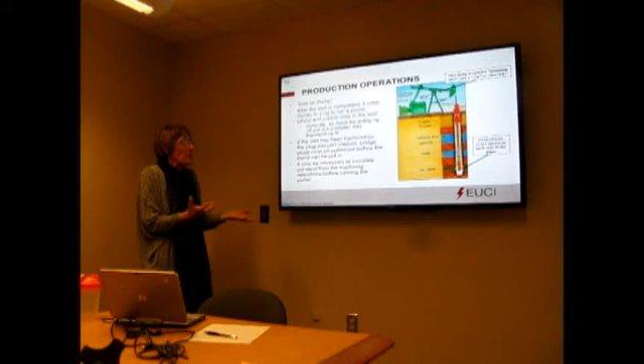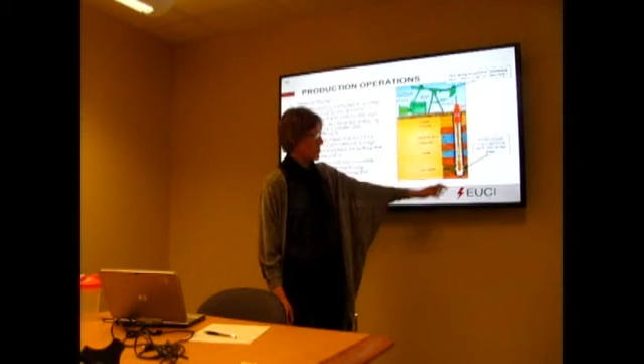You hear people talk about run-on pump. I don't know why they don't say run-in pump, because the pump is always in the well. The sucker rod pump, the pump itself is down at the bottom of the well, connected back by a series of sucker rods, which are a rod about yay big. It'll be a steel rod connected together end to end, all the way back up to the top of the well. The sucker rods are inside a piece of tubing about yay big, also pipes connected together end to end until they reach the top of the well.

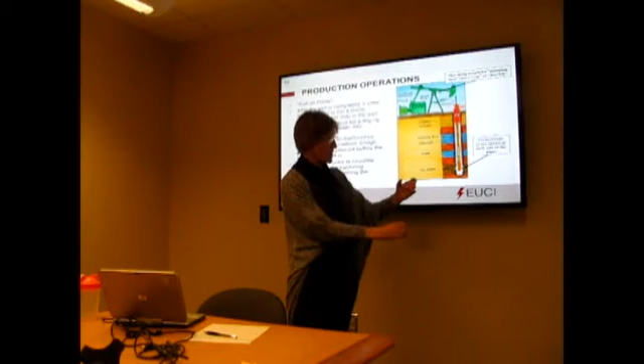The pipes are about 40 feet long because they've got to fit on a semi-truck to get them out to the site, and the sucker rods are usually a little shorter, but they're also connected together one after another to get to the bottom of the well.

Generally, when we go to run the tubing and the sucker rods in, we'll use a smaller, less expensive rig than the drilling rig or the fracking rig that was out there.

If the well has been fractured by the plug and perf method, then you'll have bridge plugs you've got to pull out before you can put the pump in, and you might also have to circulate out sand from the frac operations before you can run your rods, tubing, and pump in the well. Actually, people say run the rods and the tubing and pump, but you're going to have to run the tubing and then the rods and the pump afterwards.

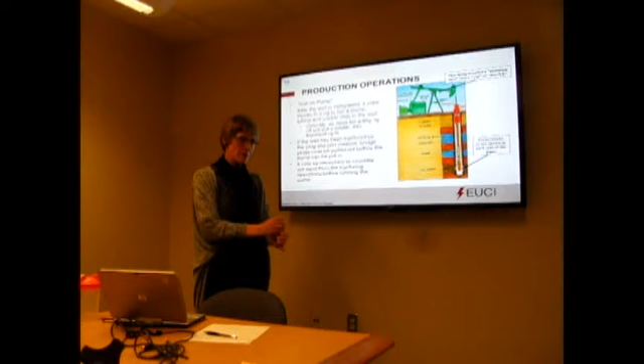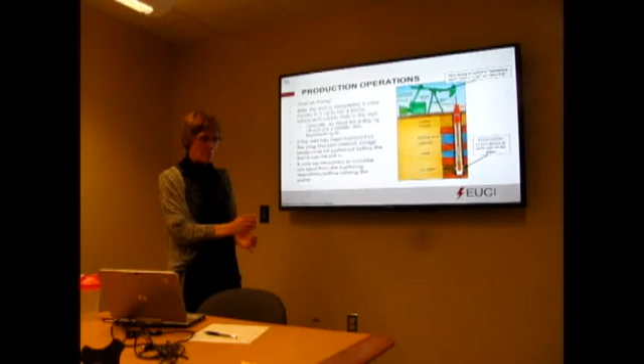There's two different kinds of sucker rod pumps. Some of them you run the tubing, then the pump, then the rods, and some of them you run the tubing, and then the pump hooks onto the end of the rods and you run it inside the tubing. So it might be that the pump is with the tubing, or it might be that it's with the rods. It just kind of varies.

You see different kinds of pumping units out there. If you see a little bitty one, it's because the well is probably shallow or it's not moving a lot of fluid. If you see a great big one, it's probably because the well is deeper and might be moving a lot more fluid, so you need more horsepower. It might have bigger diameter rods, which are heavier and require more leverage to lift them, or it might be horizontal, with the rods going around the corner and having more drag. Generally, the bigger ones will have a bigger motor. The motor will be back here.

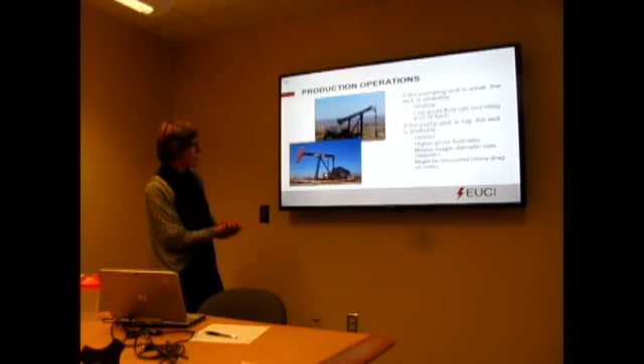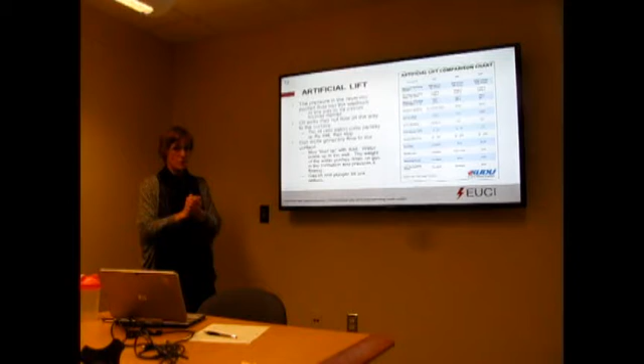We need artificial lift because although there's always going to be some pressure pushing the fluid in the reservoir over to the well, the pressure will become depleted as time goes on, and it may not push the oil, gas, and water all the way up to the surface. So oil wells might not flow all the way to the surface. The oil and water might come part way up the well and then stop, and that's why we've got to lower the pump down the well to get the oil and bring it all the way up to the surface.

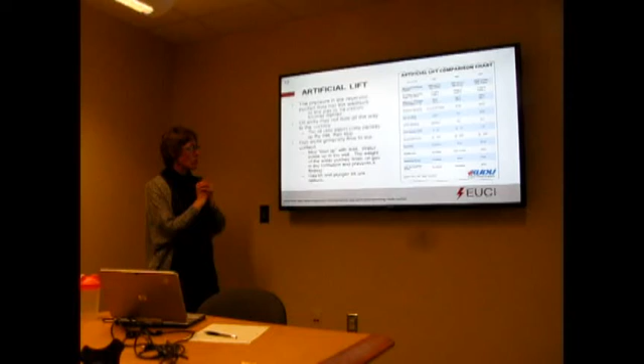Gas wells generally will flow all the way to the surface. If the gas doesn't come up to the surface by itself, there's not really such a thing.

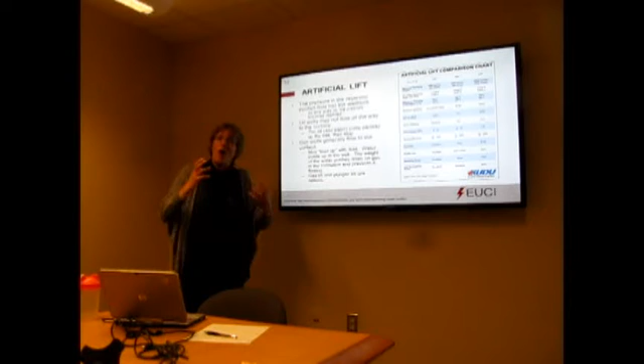It's not common anyway to have a downhole compressor. We can get a downhole pump, but a downhole compressor that's economic and common, I sure don't know about it.

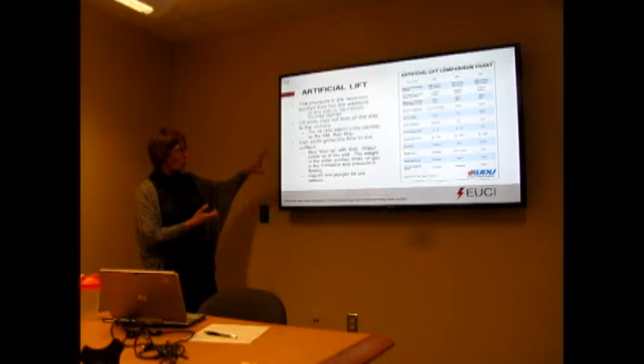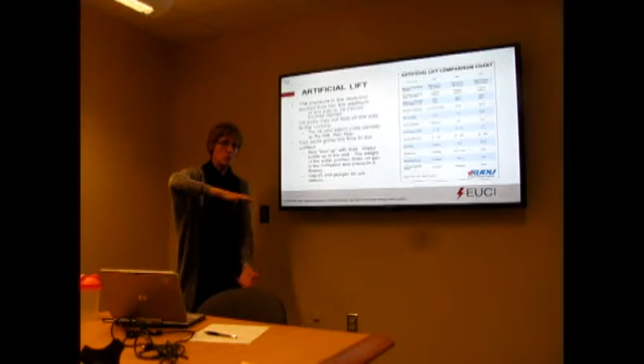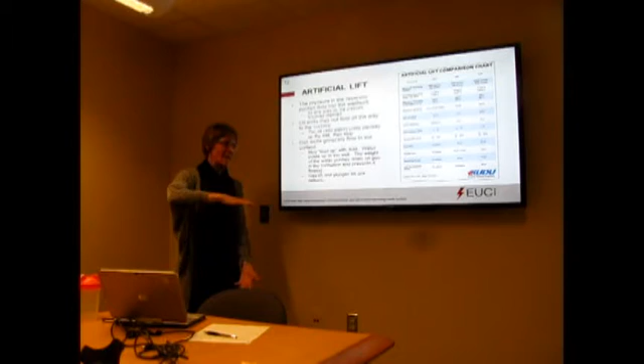Gas wells will flow all the way to the surface, but they might display a behavior we call loading up with fluid. Water might build up in the well, and just like water or drilling mud will control the well during drilling, which is desirable during drilling, water might build up in the well and push the gas down, which is undesirable once we're producing. Once we're trying to produce the well, we do not want fluid building up and pushing the gas down, keeping it in the formation. So this is what people mean when they say the well has loaded up with fluid - water has built up in the well and is suppressing the gas, keeping it from flowing.

So gas lift and plunger lift are a couple of options for getting your gas wells unloaded from having fluid in them.

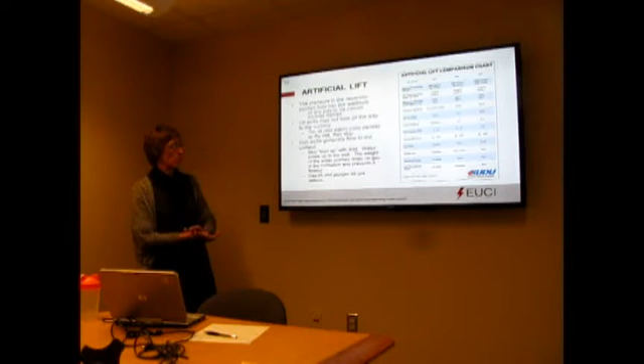Some popular artificial lift methods are pumping units and rod pumps - the unit you see out alongside the road with the pump jack going up and down.

Other methods include gas lift, where we compress gas, pump it down the well, and use it to lift liquids that we're trying to get out of the well.

Electrical submersible pumps are a pump that you run down to the bottom of the well, with a long electrical cable down to it, and you run it like any other electrical pump, except they're very high tech. The pumps are also very, very long and skinny because they've got to fit down the well. If you saw them and didn't know any better, you'd think they were a long, skinny piece of pipe. Everything they put down the well looks like a piece of pipe, for some reason.

Plunger lift is a very clever way of removing liquids from gas wells. They're pretty economical to run, but they're kind of tricky.

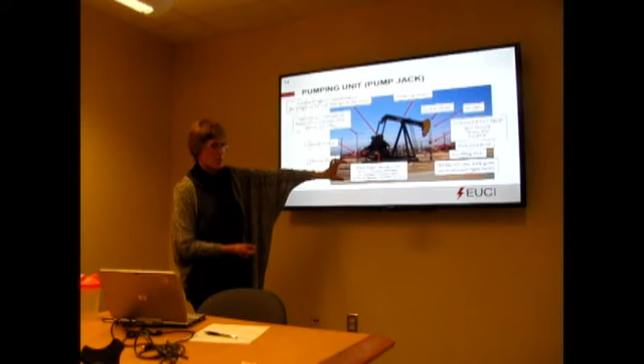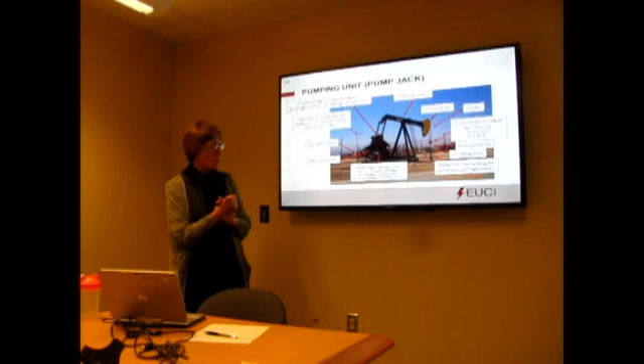The well head - here's the well proper, so the well goes into the ground right there. Generally you're going to have a well sign. These are required by the state, and they're useful for figuring out where you are. If you're lost in the oil field, you drive around, find some well, and figure out which one you're at. They generally have a section, township, and range on it. These were more useful in the days before GPS and cell phones, but they can still be useful if you get out of range of the GPS, or your cell phone doesn't know where you're at.

Electric motor will be at the back, and here's the belt going up to the gearbox. You'll have a gearbox here, which is turning the whole mechanism. The on-off switch will be at the back.

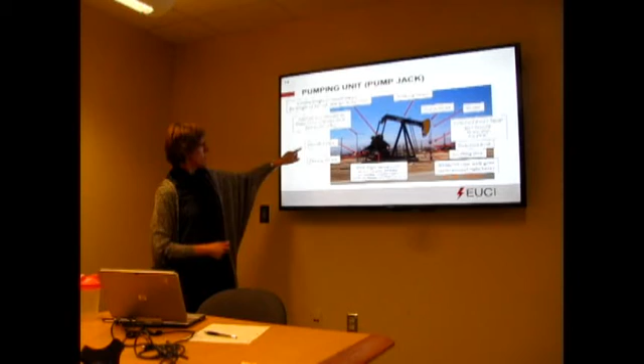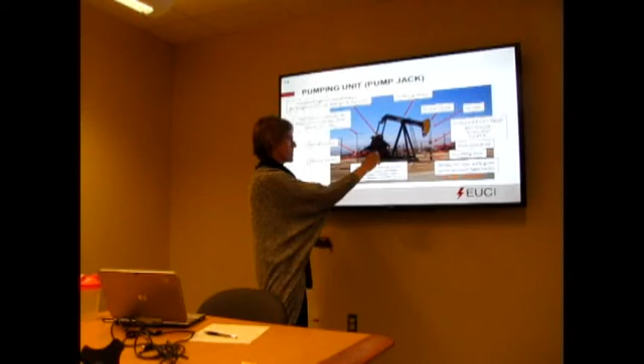This one's got an antenna, which communicates data back to the office, and counterweights. Your rods are hanging down into the well, and they're very heavy. So on the back, you've got these counterweights, these funny looking things that give it a seesaw action and balance that weight of the rods. If it didn't have that counterweight to balance it, the motor would be having to pull the total weight of those rods back up. So this electric motor would have to work a lot harder without the counterweights giving you that seesaw effect.

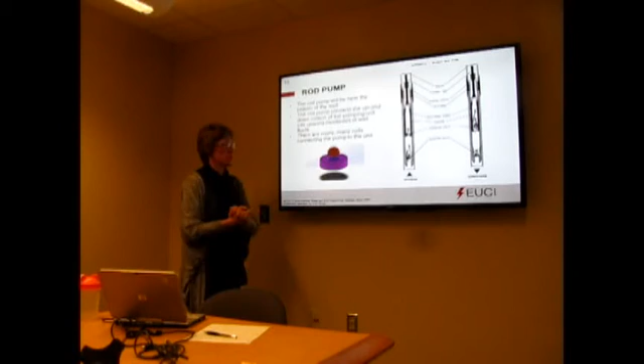Your rod pump is going to be down near the bottom of the well, because that's where you're trying to bring the oil up from. It's also going to bring up some water with it, which is just a side effect we have. We don't necessarily like it, but have to bring the water up along with it. The rod pump is going to convert this up and down motion of your rods into a fluid motion, bringing your fluid up the hole.

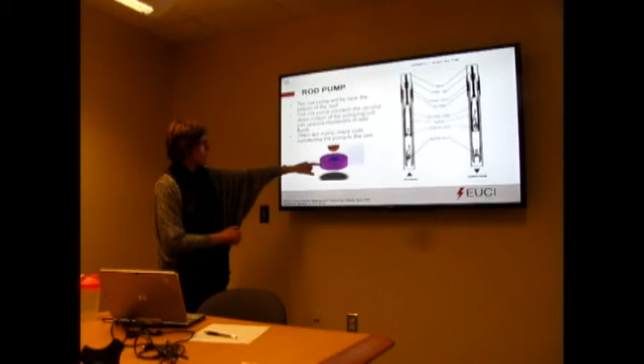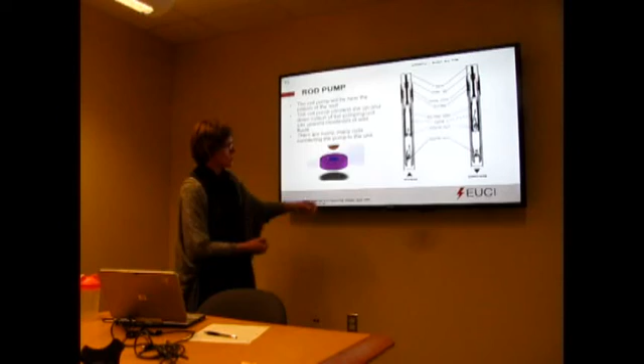And the way it works, you've got a couple of these ball and seat mechanisms. You've got this seat, which is shaped like a donut, with a hole all the way through it, and a couple of balls like this—here's one, and here's the other one. And then you've got this black thing here, which is our plunger. The plunger itself is connected to the rods and goes up and down.

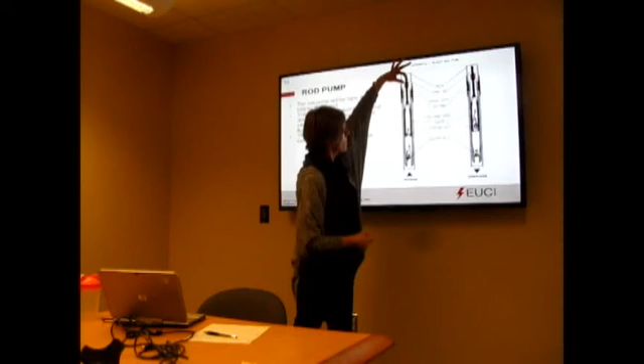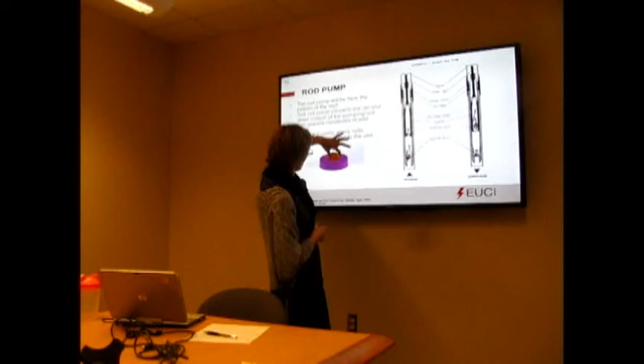So this is the so-called upstroke where the rods are going up, and this is our downstroke where the rods are coming down. When the rods are going up, this traveling valve is going to go up, and that purple donut mechanism is going to go up. It's going to catch hold of its ball, and pull that ball up.

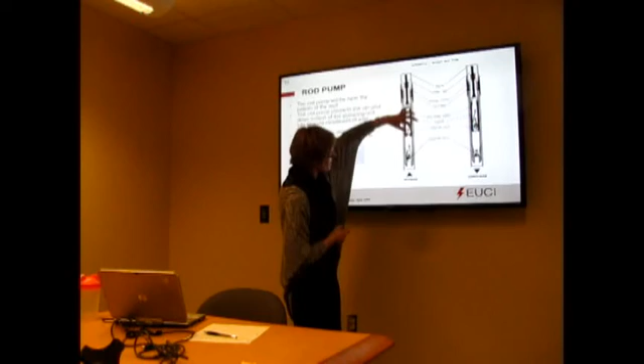This plunger is shown in cross section, but imagine it's kind of round, shaped like a jar or a cylinder. So it's pulling a cylinder of fluid up and pushing it all the way up to the top of the well and out the top. So this ball is carrying the weight of all that fluid up.

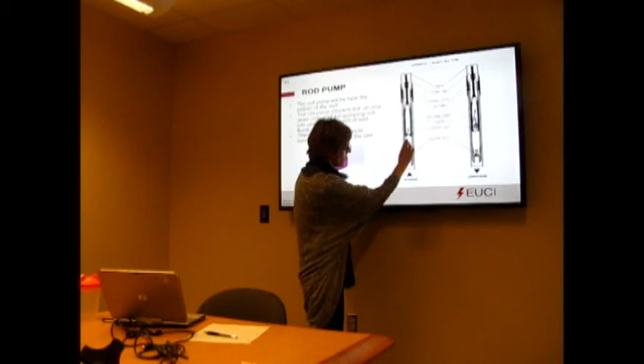Meanwhile, since this ball and its seat are going up, it's leaving a void space in here—there's trying to be a vacuum. Well, nature abhors a vacuum, so it will pull this ball up off of its seat, and some oil will come in to try and fill up that vacuum because it doesn't like it. So it pulls this guy up and leaves a vacuum, and it'll suck oil in here past that ball.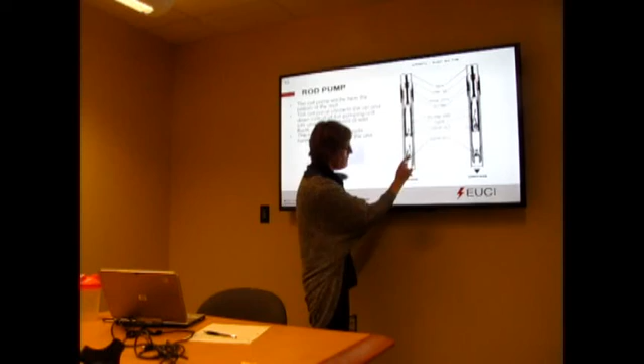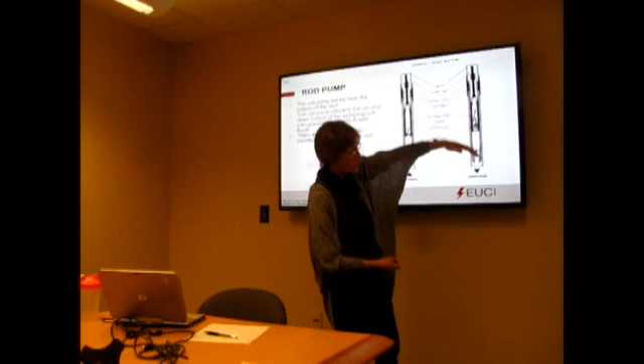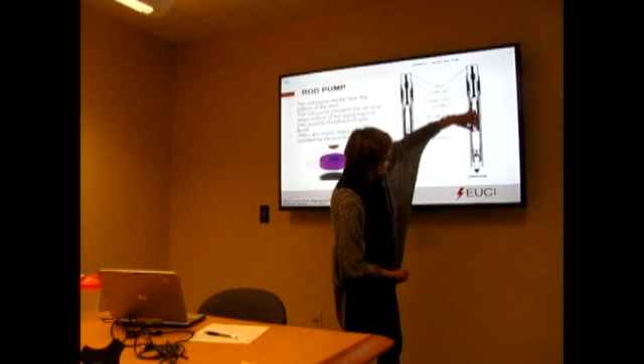Then, when this plunger starts coming back down, because the rods are coming back down, there's this oil in here, and it's forcing that oil down. This ball will seat because the oil is coming down on top of it. And because this oil is in here, it'll push this other ball up off of its seat, and the oil will go up inside of the plunger and fill it up again. So when it lifts back up, it's full of oil again, and it'll carry that volume of oil up.

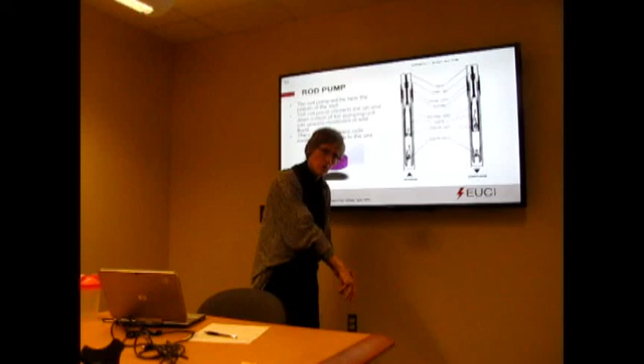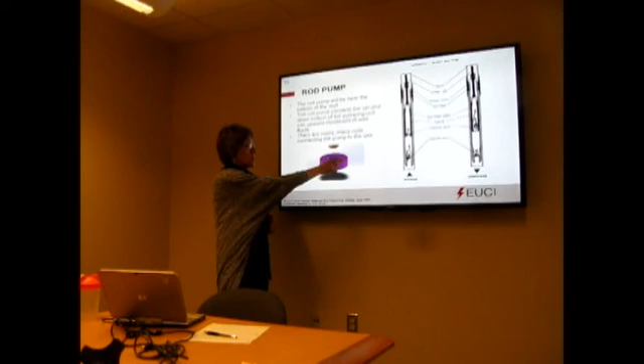So what it does is the plunger comes down and grabs the volume of oil, pulls it up, then comes down and grabs another one, pulling it up over and over all day long. That's how it works—just these two ball and seat mechanisms: the one that travels up and down, and the one that sits at the bottom, which is the standing valve, that stays stationary.